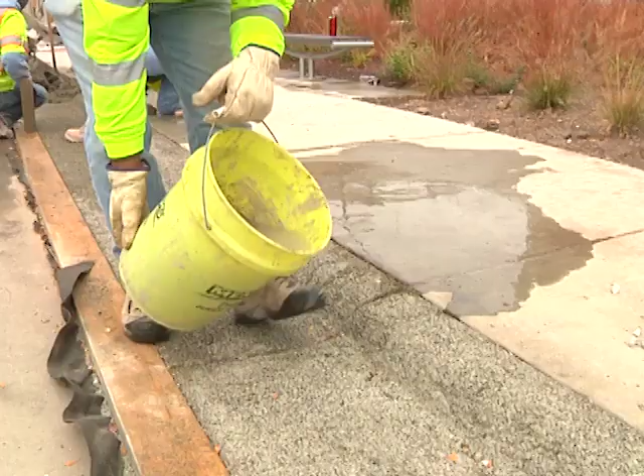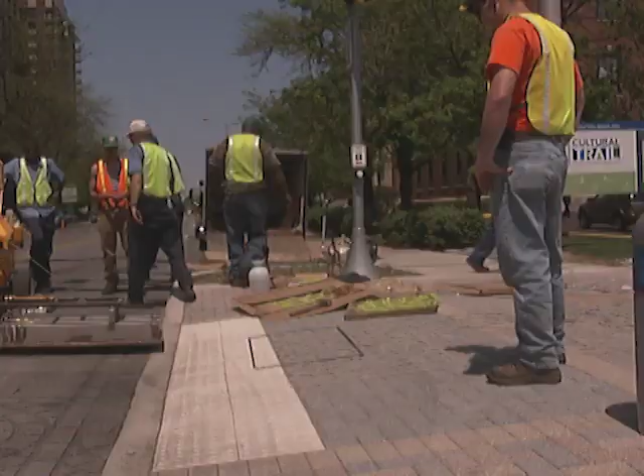We are improving water quality by using green infrastructure, such as rain gardens and pervious pavements. We are lowering the operating costs of city-owned buildings and reducing emissions by utilizing energy-efficient building management systems. We are also enhancing recycling options for our residents and constructing new bike lanes across the city.

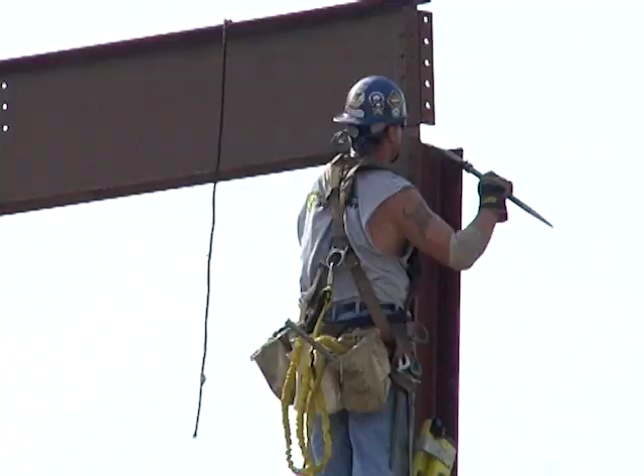The city's Office of Sustainability takes a public-private partnership approach to meeting its goals. This approach is especially critical in green building initiatives. These initiatives are most successful when local government, private organizations, and individuals work together to incorporate sustainable development practices into our city's blueprint.

Indianapolis is proud to serve as home to many organizations that embrace principles of sustainability and green building. Keep Indianapolis Beautiful, the Nature Conservancy, and the new Wishard Hospital are just a few of those organizations leading the way. There are many components to a sustainable lifestyle that are not only applicable at home, but also where you work. One major part of a sustainable lifestyle is green building.

So what is green building? Green building is the process of creating structures that are environmentally responsible and resource efficient throughout the lifespan of a building. The purpose of a green building is to reduce our overall impact on the natural environment while also considering the health and well-being of the people who use it.

So why is green building so important? On average, people in the U.S. spend 90% of their time indoors. So it makes sense to create spaces that are healthy and efficient for the people who use them. Buildings in the U.S. are responsible for nearly 40% of our energy consumption and 15% of our water use. Green buildings are created to ensure better outcomes for the natural environment and our wallets.

This is done by carefully considering all the impacts of a building project. Green buildings expand and complement the traditional building concerns of costs, utility, durability, and comfort. Unlike a traditional building, a green building is a high-performance building because it is able to function in ways a regular building cannot.

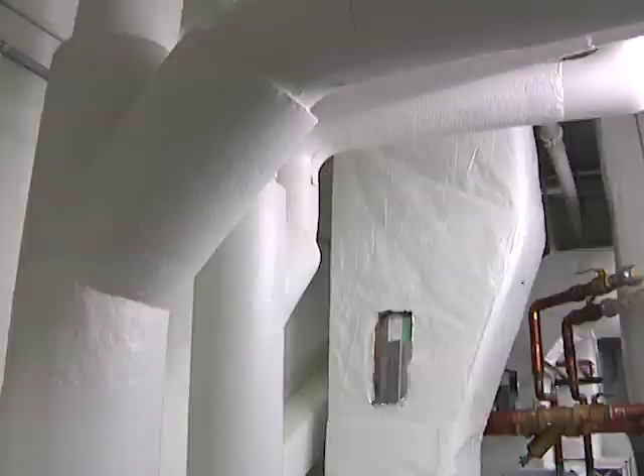For example, a green building can naturally infiltrate rainwater to avoid flooding. It can also capture and store rainwater for day-to-day tasks, such as flushing toilets and watering the landscape. This reduces costs for the building owner, conserves water, and is a relatively simple way to integrate sustainability in the workplace and community. Green building encompasses many potential strategies such as energy efficiency, materials usage, water management, and quality of life for building users and the surrounding community.

Each of these elements are considered from the outset of a green building project. Site and water considerations can include rainwater management in the form of green roofs or cisterns, or water conservation in the form of low-flow fixtures. Energy considerations might include using renewable energy sources such as wind power or solar panels. Also, energy-efficient heating and cooling systems can conserve energy.

Materials for a green building can include using locally sourced products, recycled content furniture, or sustainably harvested wood for construction.

Finally, green building can impact quality of life not only for the building users, but also for the surrounding neighborhood.

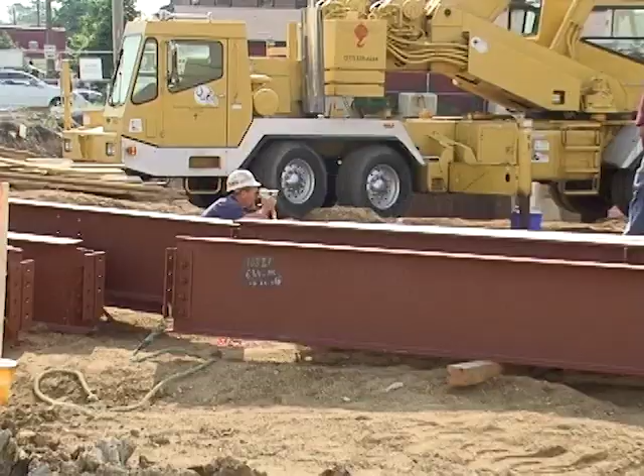So how can you tell if a building is green? A green building will have some components that are obvious and others that are less obvious. The most obvious elements are things like natural lighting, a green roof or cistern, and water and energy efficient fixtures and appliances. The less obvious components include the design, materials, and equipment that have long-term savings and provide environmental benefits, like an efficient heating and cooling system.

Another way to distinguish green buildings from traditional buildings is based on various rating systems. LEED is one such rating system. LEED stands for Leadership in Energy and Environmental Design. The LEED Green Building Certification Program is the nationally accepted benchmark for the design, construction, and operation of green buildings. It is a standardized model which uses an integrated design approach. This system, as well as other rating systems, serves as a framework for builders and designers to create green buildings.

How can green building be important to an organization? An organization that occupies a green building will see many benefits. Studies show that a healthier work environment leads to improved productivity and increased occupant satisfaction. Building owners will see long-term cost savings through lower operating costs. But the benefits of a green building aren't limited to within the walls of the building itself. A green building can be representative of the values of an organization.

Here in Indianapolis, an example of this is the Nature Conservancy's new Efroymson Conservation Center. Their new Indiana headquarters building is the pinnacle of green building in Indianapolis and represents the organization's mission in Indiana and nationally. The Nature Conservancy is an international not-for-profit organization.

We work in places all around the world, and our mission is to protect the diversity of life on Earth, to protect the plants, the animals, and the natural community types that represent that diversity, and we do it by protecting lands and waters that species need to survive.

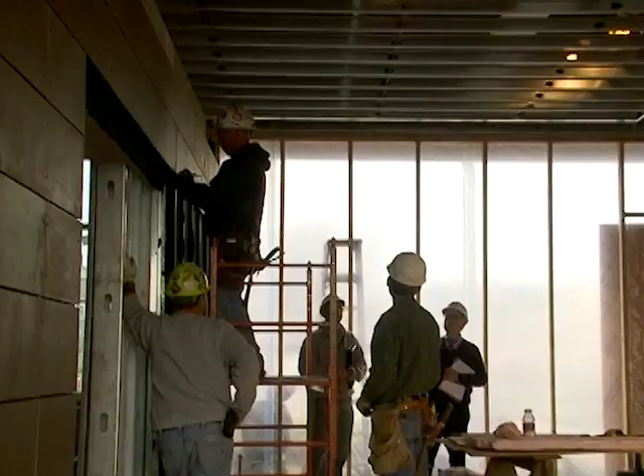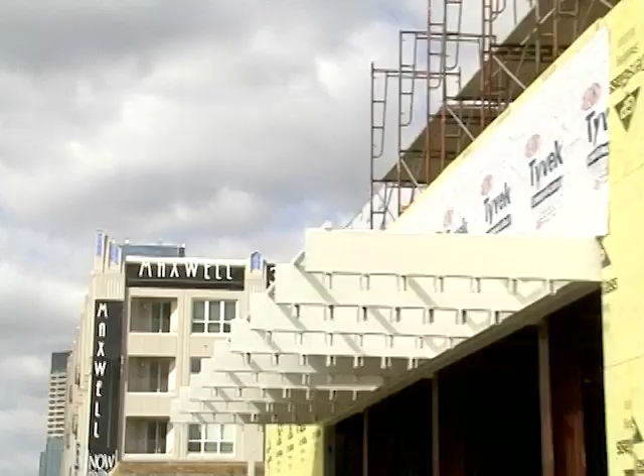Well, as a not-for-profit organization, you live and die by donations that come to you. And so one of the challenges we had is that we wanted to make sure that we could raise enough money from donors to build the building, but it wouldn't take away from the donations that we needed for our conservation work on the ground. And so we got a lot of pledges, and we brought new people to the table, people who were interested in a really sustainable building, but maybe not so interested about on-the-ground conservation. So a whole new cadre of donors came to us because of the vision of this building.

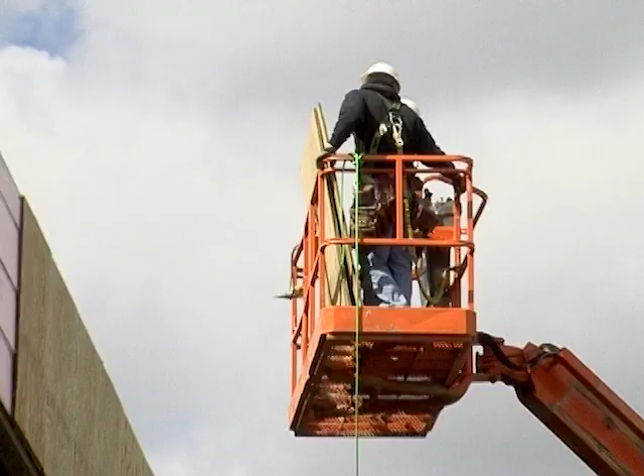We wanted to see if we could build to that highest level at the same price that we could for just normal construction. What we have is a building that uses 43% less electricity than a typical building of its size and uses 82% less water.

As we've just heard, a strong relationship between the Nature Conservancy and its funders helped lay the foundation for the success of this green building project. Another relationship, the relationship between the client and designer, is also important to ensure that goals and expectations are met. While this is true for any building project, it becomes critical in a green building project. Many of the systems in a green building are integrated, such as lighting, heating and cooling, and energy. The client and designer must work together toward a common goal to achieve an efficient, sustainable outcome.

We wanted to find an architectural firm that really fit the values of the Nature Conservancy. We interviewed a lot of different companies, and ultimately we chose Axis Architecture. They're a local firm. They have great experience in designing sustainability features into buildings, LEED experience, and one of the bonuses was they're just a block away from this building, and so they were part of the neighborhood, and it was really important for us to bring local people within our own neighborhood into this building.

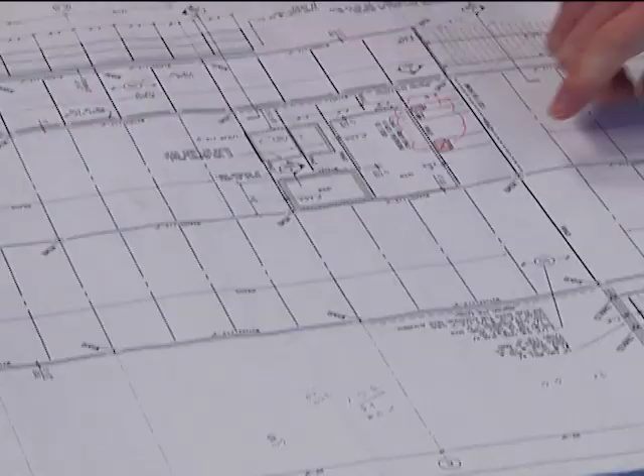What developed was an amazing partnership, a very collaborative, robust partnership of give and take between our two organizations that really allowed them to design a building that embodies the heart and soul of who we are as an organization.

Starting back when you hired us in 2007, we really sat down with you and figured out what you needed in terms of program for the space, understood your goals in terms of sustainability and marketing, and I believe we pulled all those together and created something really special that works well for you.

We weren't as familiar with green building as you are. From an owner's perspective, we were typically thinking about the end result and how we were going to use it, but we didn't know the nuts and bolts of how to get there. So it was an educational process for us as well, with the architect and construction teams bringing us along that journey, helping us understand how to get where we wanted to go.

In my mind, green building was one of the things that really made intuitive sense. It wasn't over-engineered. Part of this process is understanding that you have to think about everything at once from the very beginning, so you get to a point where it's all making sense and it's all very intuitive.

The integration of systems was particularly important for the site and water component of the project. Before design for a new building can begin, the design team must determine how the different parts of the project will fit together on the site. These components include the parking lot, landscaping, and the building itself.

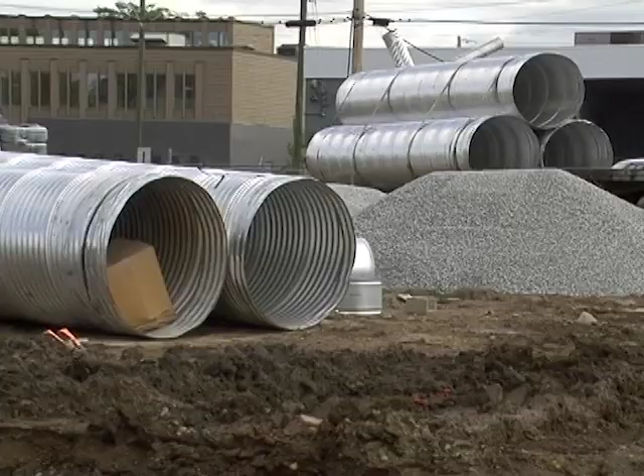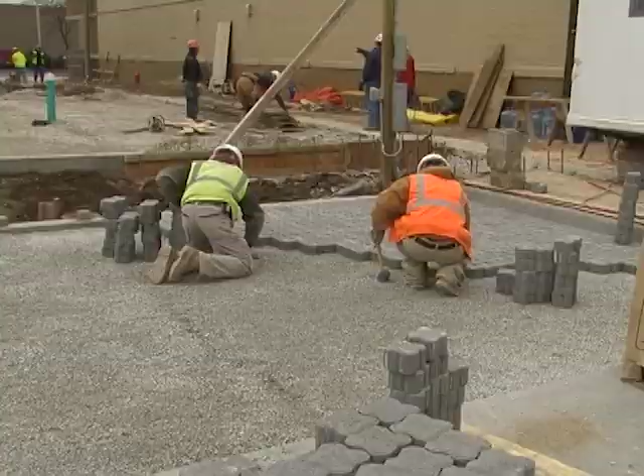A primary consideration in the process is the site hydrology, which is how stormwater is collected and stored on site. The goal in sustainable site design is to capture, store, and filter as much stormwater as possible. This can be done using a variety of green infrastructure techniques, such as rain gardens, porous pavements, and cisterns. The client and designer must determine which strategies are best for the particular site, ensuring each component works together in a sustainable, integrated site design.

Initially, going for LEED Platinum drove us to look at an urban site based on some of the site sustainability requirements regarding connection to the community. Maximizing open area was difficult in that regard because we're an urban site, a smaller site. But by putting the building further to the south and reinforcing that urban edge, we were able to leave a decent amount of area to the north for plantings.

The strategies we used on site for stormwater retention were the green roof, the cistern, and the sloped landscape back into the bioswale area just south of the parking lot.

The stormwater system for the Nature Conservancy development is one of the most exciting I've ever worked on. It takes the elements of the building itself — a green roof, the internal water use or reuse through a cistern — and incorporates the landscaping and the underground sands and gravels for the infiltration gallery, all into a single unit stormwater management system. The green roof starts everything off by collecting the water and cleaning it before it goes down into the cistern.

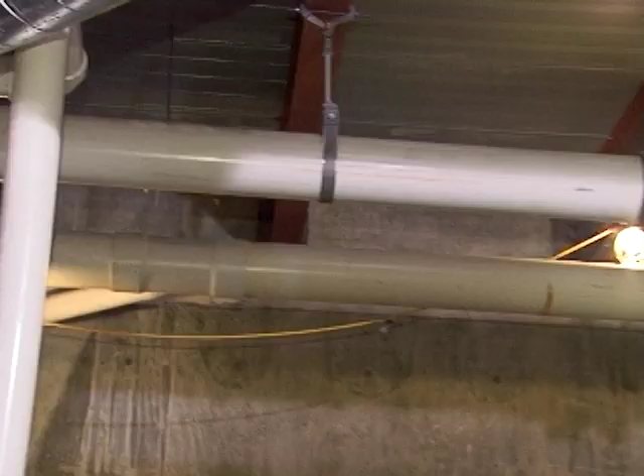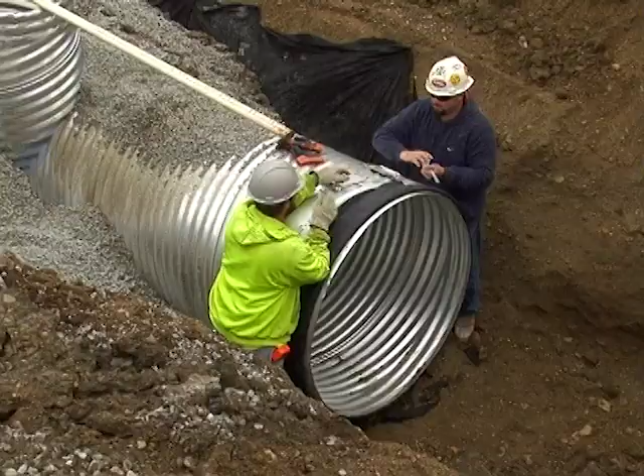The cistern holds only so much water, about 1,500 gallons, which is used back into the building itself. What isn't used in the cistern is bypassed over to the infiltration gallery underground, a large pipe with holes in it that allows the water to infiltrate.

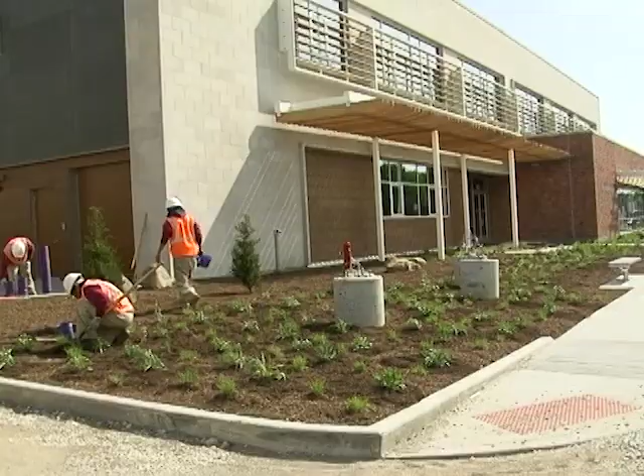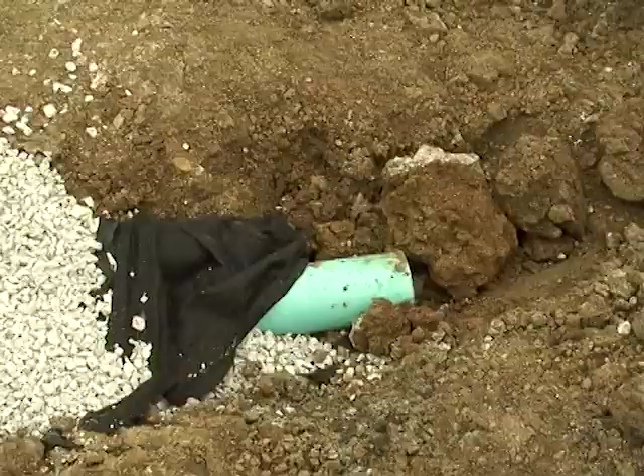On the surface we have our native landscaping, which from a LEED criteria is a water conservation landscape management tool, in direct connection to the permeable or porous pavement and the bioretention system. All of these take the stormwater directly to the underground infiltration gallery, such that all the water either ponds on site and infiltrates through the soils or is directed down underground and infiltrates into the sands and gravels.

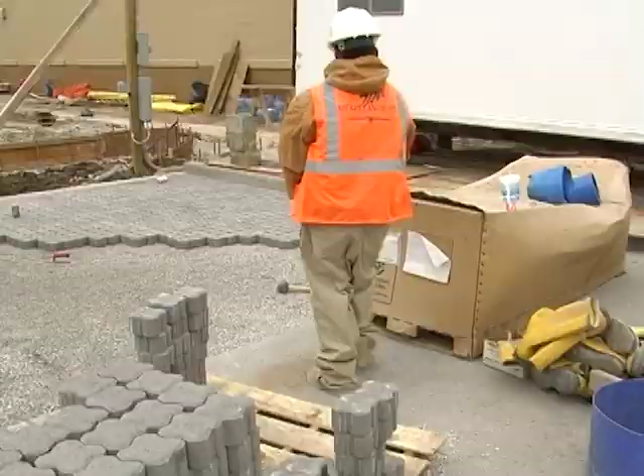The site's parking system is made up of permeable pavement, a concrete brick that allows water to go directly through it. Instead of conventional concrete, which water runs off of carrying pollutants, permeable pavement takes that water and treats it prior to discharging it into the bioretention system.

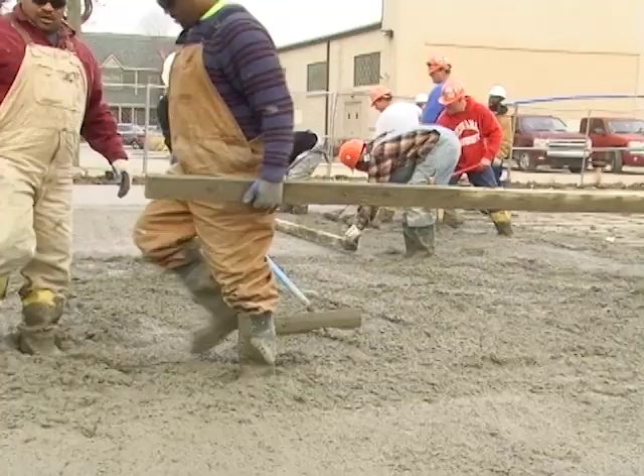Looking at alternatives of rain gardens, bioretention, green roofs, cisterns, and other natural management techniques, we were able with this site to bring forth the goal of a zero discharge site. All the water stays here.

The types of plants used on the Nature Conservancy live roof are typically sedum plants. They're all perennials — they'll go dormant in the winter and come back in the spring.

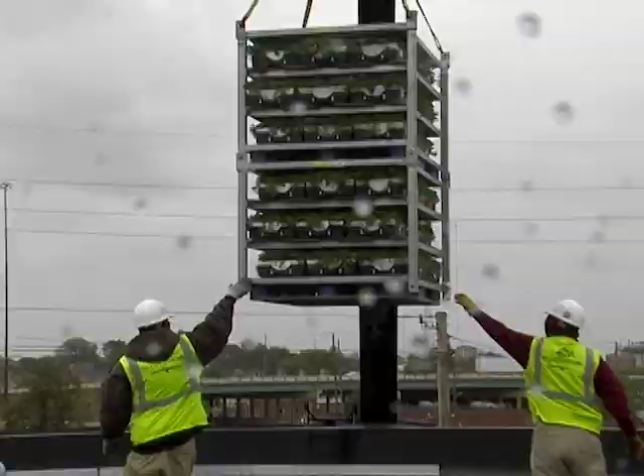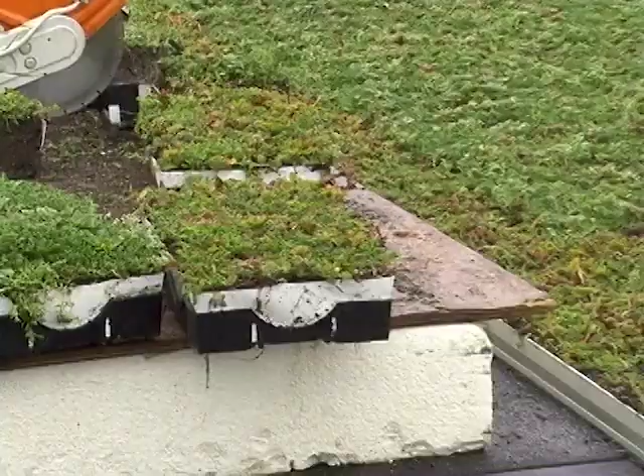During the summer months, they're all going to bloom, and they're very drought tolerant, so they'll need very little irrigation. The live roof system is a hybrid tray system, so it's meant to grow together. It comes to the site fully vegetated, so when it came here it was about 95% grown. The maintenance for it is very minimal. About every 2 weeks or so, somebody will come up on the roof and walk it, look for any weeds, if anything's growing, determine if it needs any irrigation.

The live roof system that's here is going to hold about 99% of the rainfall that it's going to accumulate, but it kind of acts like a sponge. So once that soil is saturated and it's going to overflow, the water will continue to roll through and be collected in a cistern so it can be used for other irrigation on site.

If you have a regular membrane roof, you're going to have temperatures of about 140 degrees or higher. There's going to be a lot of UV damage to the roof over time. When an owner elects to put a green roof on it, you're going to help to cool the roof. It's going to bring the temperature down to around maybe 120 degrees typically.

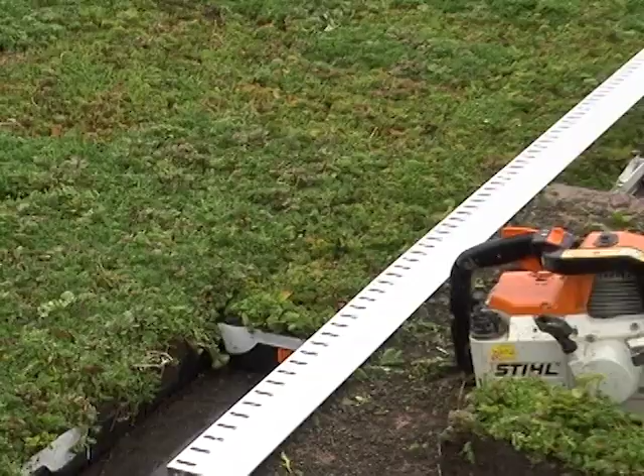By adding a live roof or a green roof system to an existing membrane, you are increasing some cost up front, but you're saving it by extending the life of the membrane because it's not exposed to UV, and you're also saving costs and energy by allowing the roof to be cooler and not having to use as much air conditioning during the summer months.

In terms of aesthetics, a traditional roof is usually a black membrane, and it's usually not very attractive looking. And with a green roof, it's actually greenscape. You're looking out into green, you're seeing plants and flowers and bees and butterflies and probably some ladybugs hopping around. So it's just a beautiful environment.

I think that was really one of those systems. We talk a lot about this building and this project not having any groundbreaking technology. It was just a compilation, and the right compilation, in bringing all the technologies together up front. But the stormwater system was one of those that was really pretty groundbreaking, tying everything together and being an ultra-urban setting that had zero discharge.

We had a number of goals when it came to developing the native landscaping for this site. Probably the first one, and maybe the most important, was just to have a beautiful setting for this green building, something that people would really enjoy walking through on their way into the building. And the second was we really wanted to use a wide array of native plants in the landscaping to show the diversity of plants that are out there and available for landscaping that can fit any landscaping need.

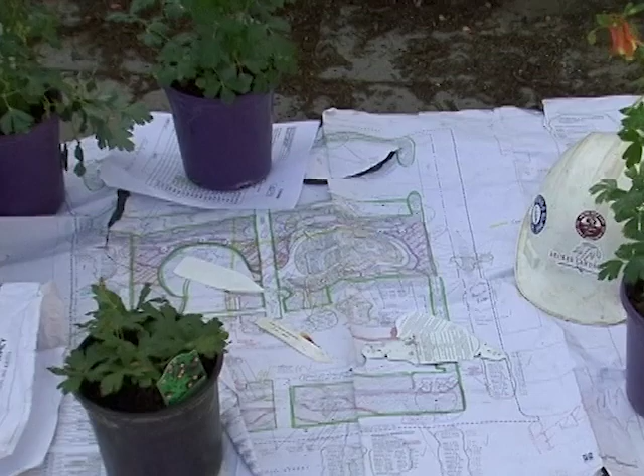And the third was, to some extent, we wanted to showcase our conservation mission in our landscaping. We wanted to take some of the plant groupings of natural communities that we protect in Indiana and replicate those in a landscaping setting. For instance, we have a beautiful natural area called Big Walnut Nature Preserve in Putnam County, and it's characterized by having these towering black walnut trees over redbuds in the understory and bluebells carpeting the ground in the spring. So we incorporated all of those species into our Big Walnut planting.

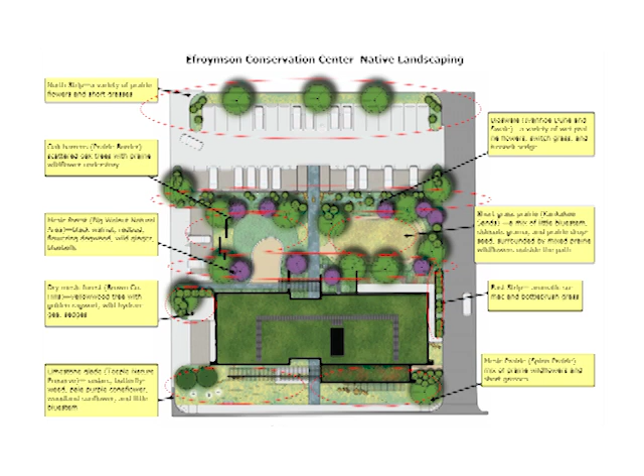And you can walk and see some of the iconic species of that community type. And we did the same thing for a number of other communities that we protect in Indiana. So people get a little bit of a flavor of what it is we do in the state just by walking through the landscaping.

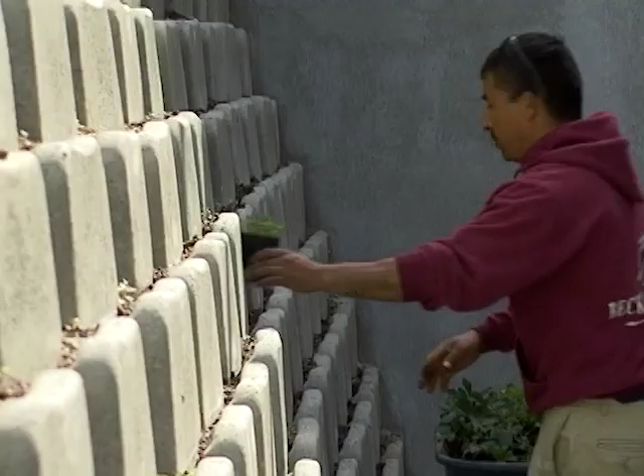Live wall was a real challenge to the landscaping because usually when you do a retaining wall of that type, what people are looking for to cover it up and make it green is a very, very aggressive vine, like a winter creeper or an English ivy, both of which are invasive and cause us great problems in natural areas in Indiana. So they were the last things we wanted to use.

So we thought about what are the plants best adapted to living with a very small root area, soil depth, and we came up with a series of cliff plants, things like wild geranium, and wild columbine, our native sedum called stonecrop, and wintergreen, native wintergreen. All are found on cliffs in southern Indiana and have the ability to deal with very harsh settings. And we've put those into the live wall, and they're doing quite well.

It's really amazing to look at the photos before and after we put in this landscaping. Before it was asphalt and gravel, and now we have over 14,000 square feet of native landscaping.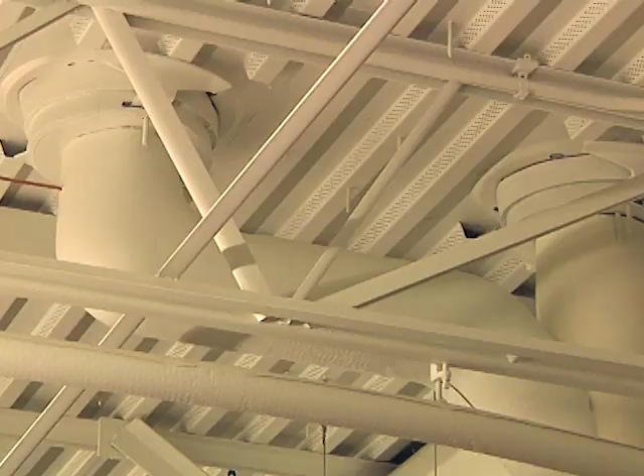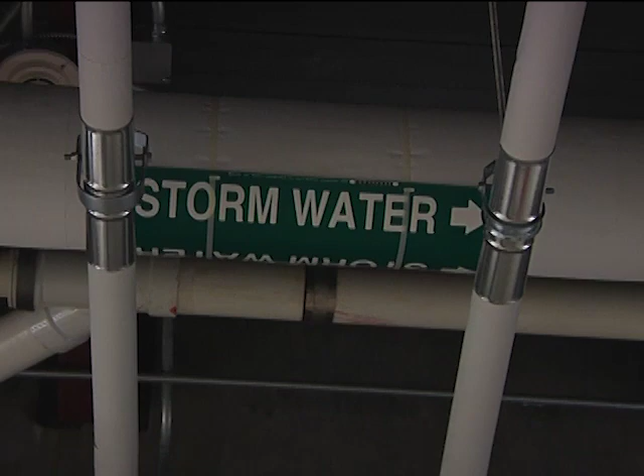So we've got an important piece of greenscaping right here in downtown Indianapolis that is visible to everyone driving by on Ohio Street, and anyone who walks through can see just how this has changed from the sterile landscape that it was before. From the perspective of the Nature Conservancy, it was less expensive to build an on-site zero-discharge system with less infrastructure than it would have been to build a conventional stormwater system and connect it back to the city's combined sewer.

From the perspective of the city, every gallon that is kept from the combined sewer is money saved in energy and operations of their combined sewer and their wastewater treatment plants. One of the things that this site brings to the city of Indianapolis, in fact to the United States, is one of the first ultra-urban developments to have a zero impact on a combined sewer. It sets the standard very high for all other communities in low-impact development.

Some of the big lessons learned, I think, during this process were the need for really tight coordination from the design process through construction in dealing with a very tight site, trying to get all of our stormwater to stay on the site, you know, with geothermal wells in the mix there too. I think that's the biggest lesson learned, is you've got to really look at everything up front.

One of the things we really wanted to accomplish with this building and with the site was to serve as a model and an example that you could get out there and touch and feel, and would really not only impact the 1 acre site that we had, but potentially impact Indianapolis and help other people to make those same decisions, or even nationally. And stormwater and the way that we handle that on site is one of those areas that really did leverage up.

Other people paid attention to it, have looked at making similar decisions on their own property, not only in Indianapolis, but nationwide. The fact that it wasn't a cost increase to do so was also a big benefit in being able to show people that.

A fundamental concept of green building is energy efficiency, which delivers low operating costs and environmental benefits. During the design of a building, the architect takes into consideration all the ways energy will be generated, used, and managed on the site. A building uses energy in several ways. These include the lighting, heating and cooling, computers, and appliances. A building project can create energy by utilizing renewable energy sources, such as wind, solar, and geothermal.

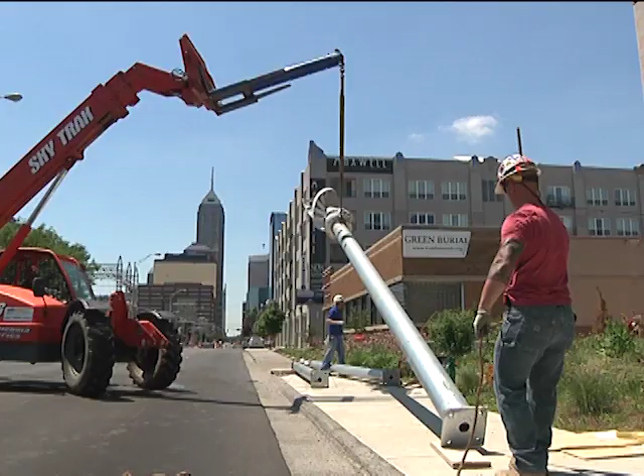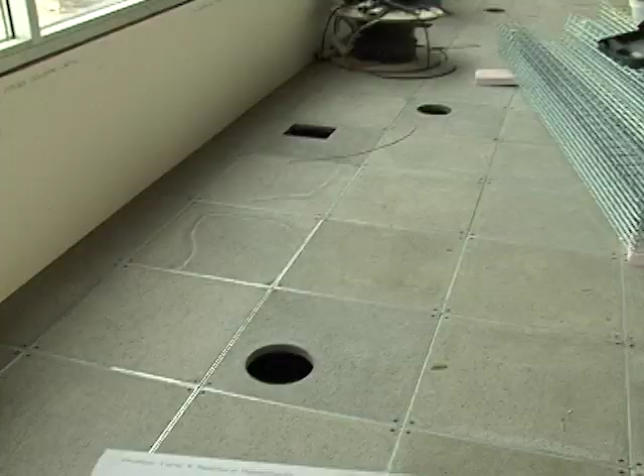The energy goal of green building is twofold. First, to use energy efficiently, and second, to produce energy sustainably if a renewable source is viable. It is essential for the client and designer to consider the characteristics of the site that influence the viability of using renewable energy sources. Another important factor is the integration between the building systems and the natural environment.

Energy is one of those categories that's very important for the LEED Platinum rating. Obviously, you need to get a lot of points in EA Credit 1 so that you can get to that level. We have to look at a bunch of different things and how they all interact, from the light systems and how using less lighting introduces less heat into the space, so therefore you can reduce the HVAC loads, to the raised floor system, which allows us to use smaller fans pushing that air through the space, all the way to what type of insulation we have in the walls.

And all of these things come together, including renewable resources like on-site energy, wind turbines, to really get that energy model shrunk down in terms of your energy use. Right, and from our perspective, I think there were really three things related to energy. The first is, reducing energy has a close impact on the environment, which is a big part of our mission. The second, reduced energy costs for the ongoing operations was important to us as an organization.

And the third part about energy was making it as automated as possible. All of the controls in the building, even though we're the Nature Conservancy and we're probably pretty in tune with that and careful about managing our energy in the building, it's made a world of difference to have that automated. We don't have to think about turning lights off as we come out, and it's saving us energy consistently throughout. So that was really an added bonus of those sensor features throughout the building that made a big difference for our energy costs.

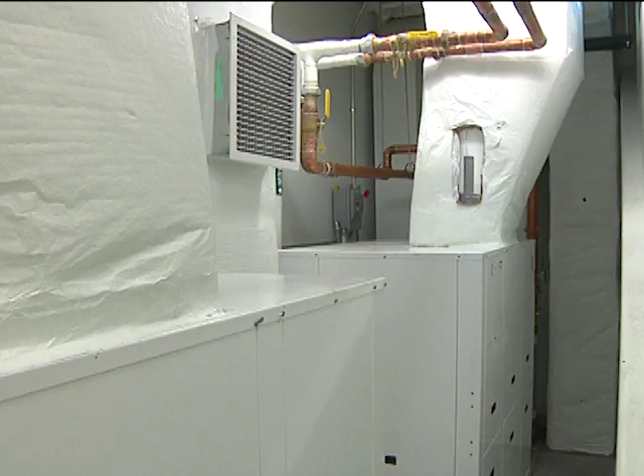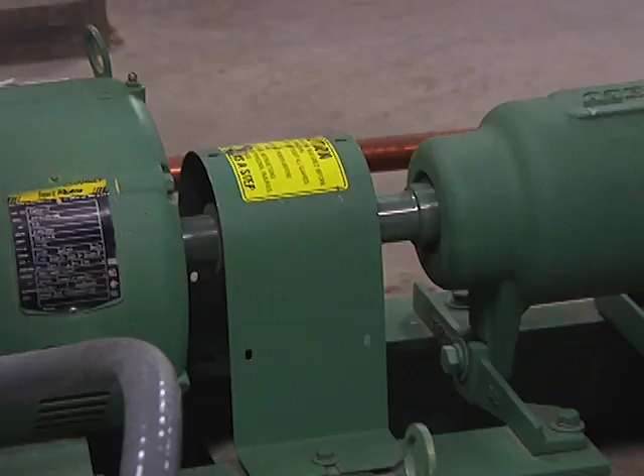Exactly. The geothermal design is, if you wanted to compare to a residential project where you might have commonly called a heat pump outside that exchanges its heat to the air, this one actually exchanges its heat into the earth. And it can do that year-round. So in the winter, when we want to heat with our geothermal system, we're pulling heat out of the 55-degree constant earth temperature and using that heat to transfer through a cooling medium into the space.

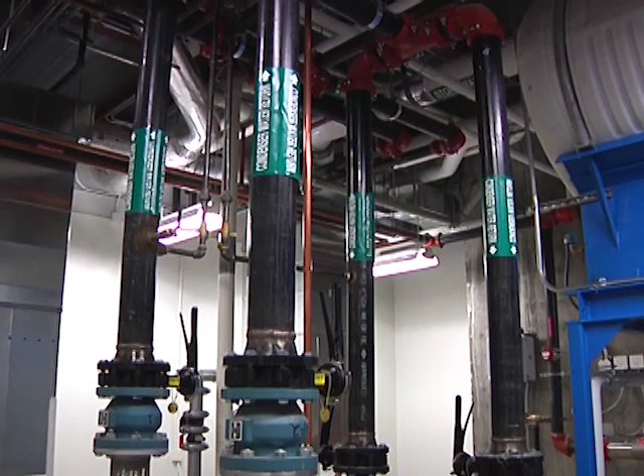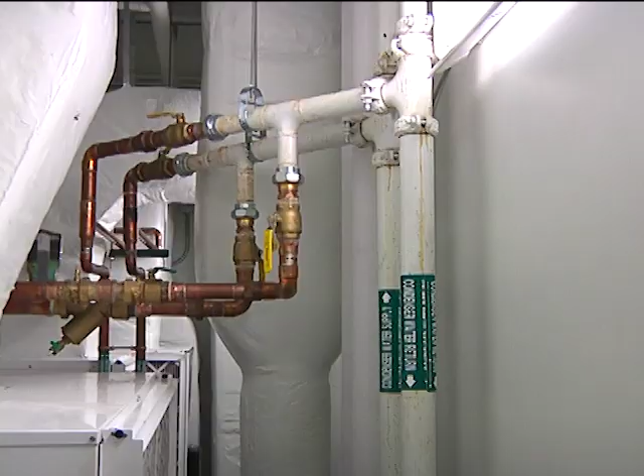In the summer, then, when we want to reject heat, because we want to get rid of heat that's in the building, then we send that fluid back into the earth, which will be hotter than the 55-degree temperature, and we sink it into the earth and get rid of the heat that way. The components in a geothermal system involve transferring a fluid, and we use a glycol solution. It's called propylene glycol.

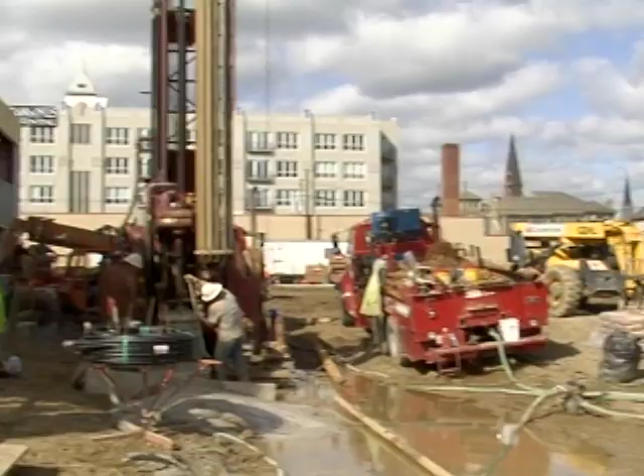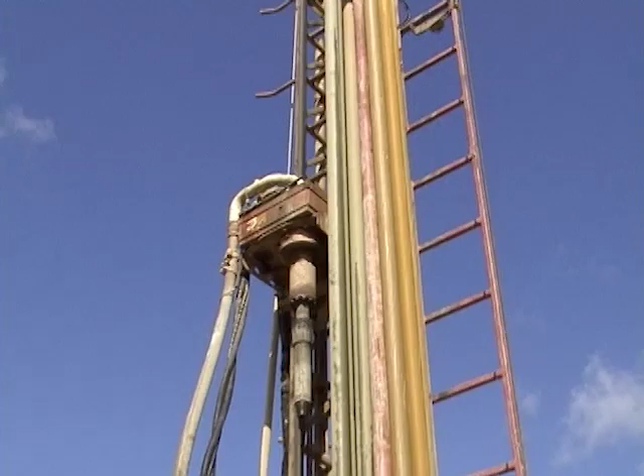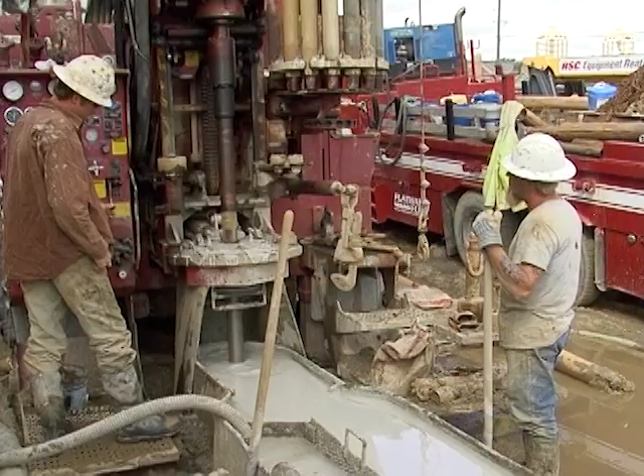We transfer that fluid through piping that runs underground and into what we call bores or wells. We drill wells down into the earth, and in this project we drilled down 300 feet into the ground, and we used 38 wells to accomplish the tonnage that we need to transfer the heat into the earth. We chose the vertical bores on this site because it uses the least amount of land area, and being limited in an urban setting to just a small site here, we took advantage of the parking lot and some of the landscaping outside and developed our well field outside.

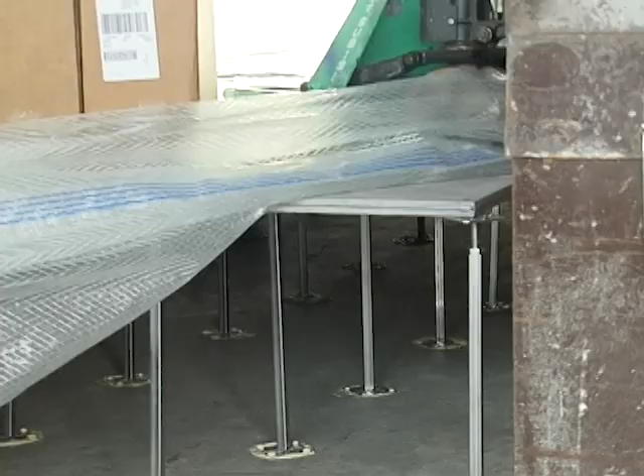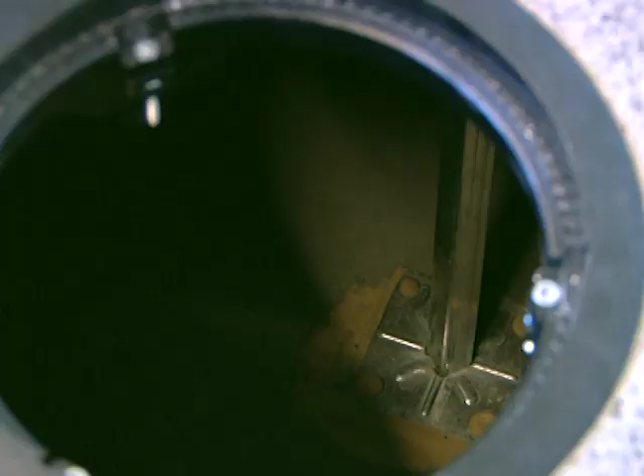In this job, it's a little unique in that we have a raised floor system, and the raised floor system takes advantage of supplying our air from our heat pumps down under the floor and using the entire floor as a plenum, and then you decide how much air comes into the space by using floor diffusers that are located in strategic locations based upon the occupancy. The airflow from the heat pump units supplying underneath the floor supplies a temperature that is typically around 60 degrees, and that makes it comfortable for that air to come up around you.

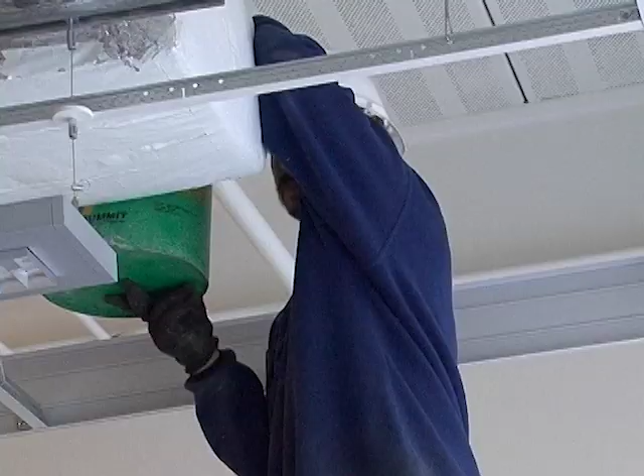We use the underfloor air distribution system because we have the cleanest air that came through our heat pump unit that was filtered and it was conditioned air. We supply that into the plenum. We supply that up into, let's say, your cubicle or your room through a floor diffuser. It moves that dirty air up to the ceiling, and then we return the air at the ceiling. So we're always keeping the cleanest air around the occupants.

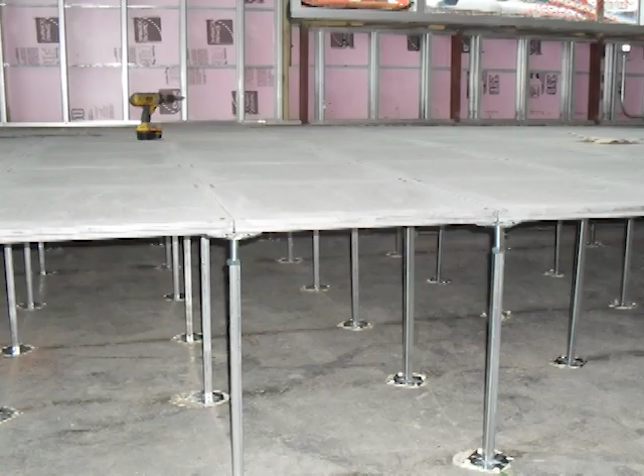The underfloor air system also offers an acoustic separation between air delivery into the space coming from underneath the floor. It has to pass through a pretty heavy floor panel. That separation of the air, which is at a very low velocity, very low static pressure, actually moves fairly slow up through the space, and so it doesn't make as much noise.

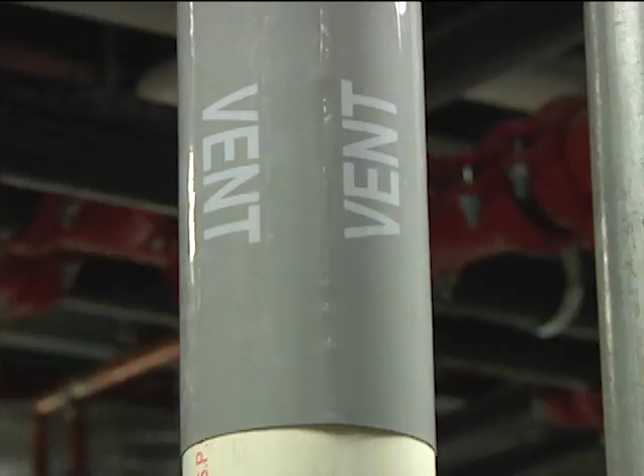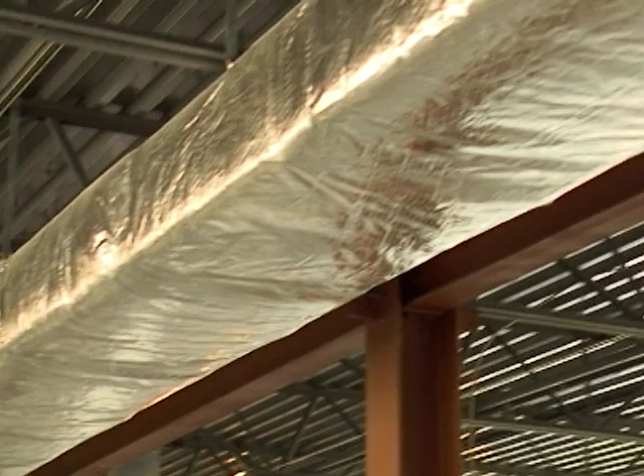One of the LEED points we went after here was increased ventilation. And it's important to bring fresh air into the building. We're building the buildings tighter. We have a more controlled environment for infiltration of dirty air coming in from the outside. So we have a dedicated outside air heat pump unit that brings in the amount of air that we need based upon a given amount of air per person that we account for. We condition that air and distribute it throughout the building by ducting it to each one of the heat pump units. Each one gets their own source of outside air.

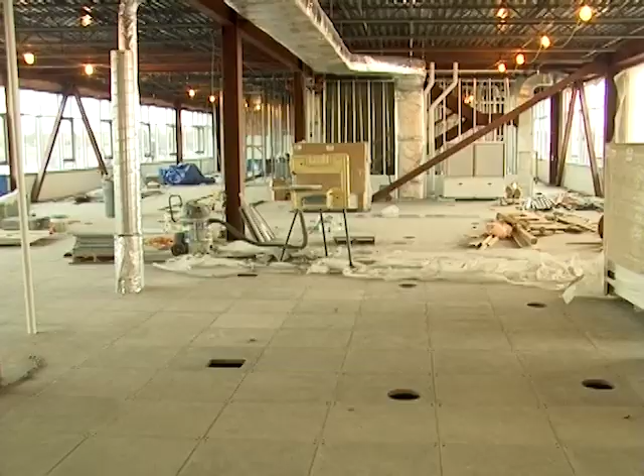In our modeling, what we call our energy modeling of the building, we computer simulated it through a year's operation. And the year's operation energy costs for the building were expected to be about $24,000. We're saving $10,000 a year by using the geothermal, the more efficient lighting system on this building, and the method that we're using to deliver air to the space with the underfloor air system. So we think we have a decent payback on this project.

I think one of the things that a lot of people don't think about in terms of energy efficiency is introducing natural daylight into the space.

Within this project, we're able to get every occupiable space a view and natural daylight, which reduces the amount of electric lighting that's required and therefore reduces the amount of HVAC that's required, therefore reducing your total energy consumption. With the added benefit of all the staff able to have natural daylight in their workspace.

The goal that we were trying to address with this building as it applies to LEED was to, number one, provide comfortable lighting that suits the purpose of the people that are here. And at the same time, we need to minimize wasteful lighting, overlighting things, as well as LEED's very particular about amounts of light that spill out of the building onto the site. So we had to be very careful about placement of the light fixtures, where they are from the windows, so that we're not throwing a whole bunch of light out of the windows onto the site.

The fixtures we selected in here, a lot of them use a high output fluorescent light. It allowed for the fixture body, the shape of the fixture, to be much smaller, so it's a more economical use of materials in constructing the fixtures. We tried to provide a light level through ambient lighting. Most of it is indirect. It bounces off the ceiling and down onto the space on the order of 20 to 30 foot candles, which is a comfortable level, but sometimes that needs to be supplemented by task lighting at the spaces.

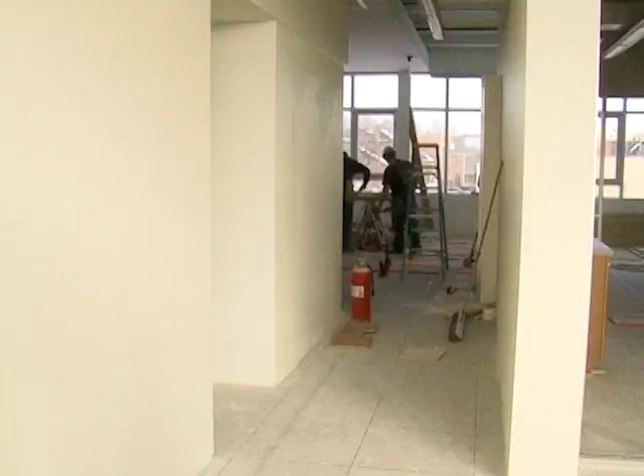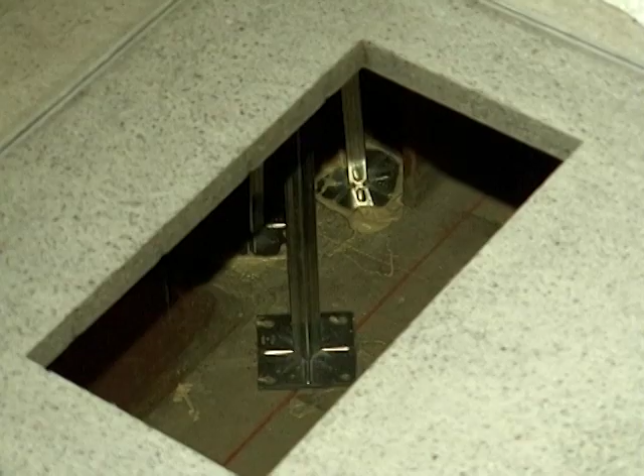Most paints, adhesives, carpets, and furniture give off volatile organic compounds, or VOCs. Over time, these harmful chemicals evaporate from the building materials into the air we breathe. This is called off-gassing, and the effect gives a traditional building that new car smell. Long-term exposure to these chemicals is unhealthy for the people who live or work in the building. Green buildings avoid the use of materials that off-gas these chemicals and instead use low VOC materials.

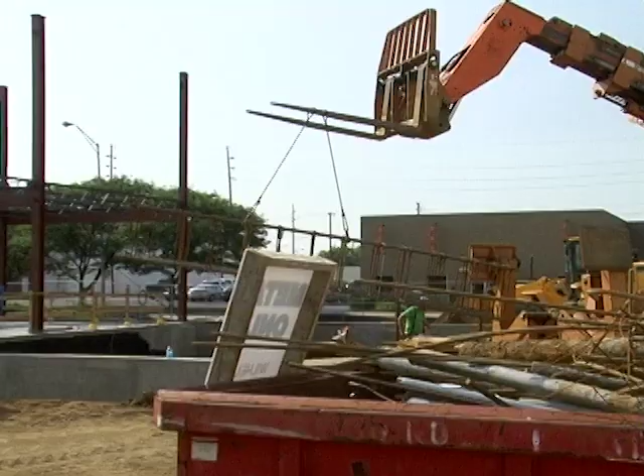Finally, another goal of green building is sustainable waste management. This includes the recycling of waste during construction and after the building is complete. Building materials include everything from the steel structure and drywall to the flooring, paint, and furniture. Therefore, it is necessary for the client and designer to collaborate and share the common goal of using the most sustainable materials possible.

In terms of LEED requirements, there are a number of different things in the materials and resources category, like utilizing low VOC paints and adhesives, using rapidly renewable resources, recycled materials, things that we've tried to incorporate within the project as much as possible. But I think one of the things that gets kind of lost is the fact that a lot of times you don't have to use a material in a space to accomplish what you're trying to do, and really the use of no material is probably the most sustainable thing you can do.

And materials to us was really important because we had certain materials that we wanted in the project that really meant something to us. We've got a lot of Indiana limestone in the project. We have a lot of Indiana hardwoods. The hardwood was produced on 3 of our preserves through sustainable forestry practices. So that material not only warms up the space and makes it feel more like our mission, but it also gives us the ability to talk about things like sustainable forestry. As we bring people through the building for tours, we can help educate.

One of the things that people sometimes forget about is reusing materials when they can. Case in point, when we reused the bricks from the buildings that were on site previously. The Nature Conservancy project had LEED requirements to divert 75% of the construction waste from the project away from traditional landfills. On this project, we utilized an on-site trash sorting and separation process in which we separated the construction debris into several categories: aluminum and metals, cardboard, wood products, general trash, and construction debris such as would go into a clean fill.

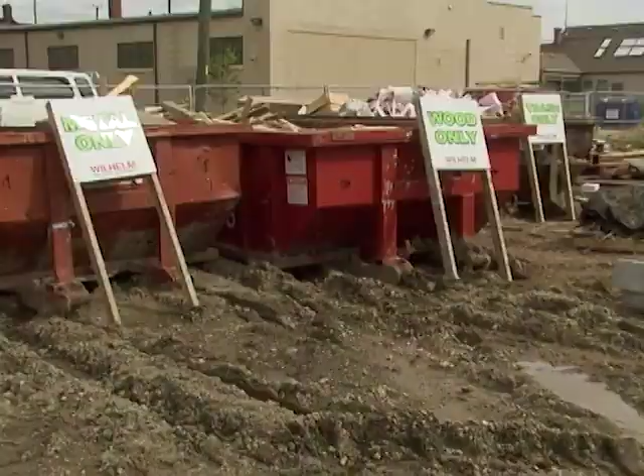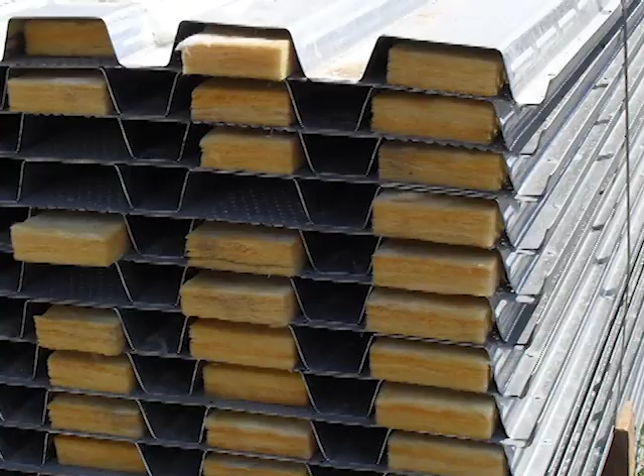We were able to divert 79% of the waste from the project away from a landfill to a recycled or clean fill site. This resulted in 129 tons of debris that was redirected. Another component of the Nature Conservancy were the regional manufactured materials. This is a LEED requirement for 20% of the materials on the project to be manufactured within a 500-mile radius of the project. 60% of all materials on the project were manufactured within this 500-mile radius.

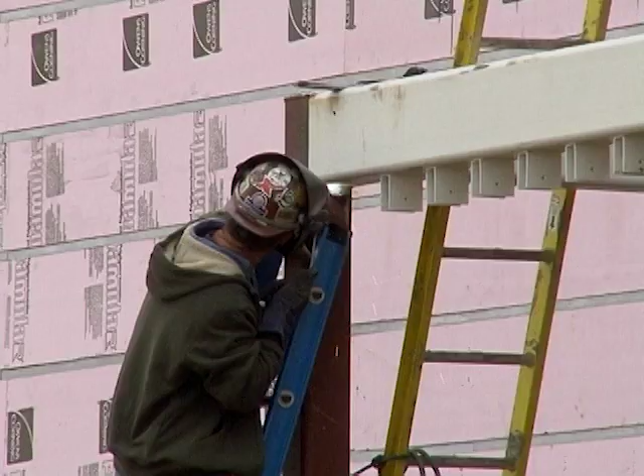Some of the major components that are regionally manufactured are the structure, the steel, the concrete, the rebar reinforcement, and the Indiana limestone, which is on the exterior of the building. The existing structures on the project site were not fit for use or occupancy and required demolition for the clearing of the site for the new project. This allowed us to look at the projects and decide what could be reused or recycled.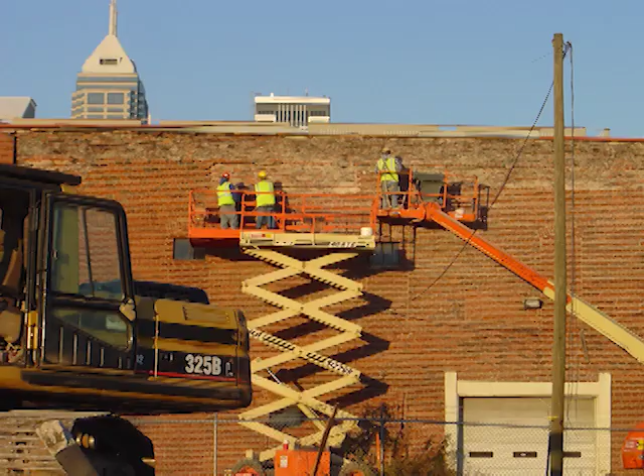And the architect reviewed the brick on the existing buildings. During demolition, this brick was removed, cleaned, and then we reused the brick for the exterior and lobby of the building. And it turned out to be a unique 100% recycled component and a beautiful aspect of the exterior.

It really blends in well with the building and gives it a lot of age and character right from the beginning. With all construction projects, large or small, there are opportunities to use several of the methods utilized on this project to help your project become more green.

From the beginning, we really understood that there were a lot of LEED requirements in terms of materials. So being able to talk with you from the very beginning about the potential to use some wood that you had in your properties, down to reusing some of the brick that was on site, it was good to get that stuff fleshed out early because we knew there were going to be lead time issues in some instances.

That upfront planning about the wood was really important for us as an organization because we needed to plan in advance how to do a sustainable forestry harvest on three of our properties. That allowed us to pick out red oak, shagbark hickory, maple, and tulip poplar for use in the building. A really neat part of the building that we were tied into closely: our staff members had touched that wood multiple times before it made its way onto the construction site. It really warms up our space and ties us back into the mission, even when we're working at a desk and looking at wood in the building.

When selecting the materials for the Nature Conservancy, working closely with the architect and the client, our goal was to bring the outdoors in. The Nature Conservancy really didn't want to feel that departure. So when we selected the finish palette, whether it was the carpet that had shades of browns or trees in it, or the sidelights with etched trees in the glass, or the colors we selected, they all contributed to elements you would see in nature.

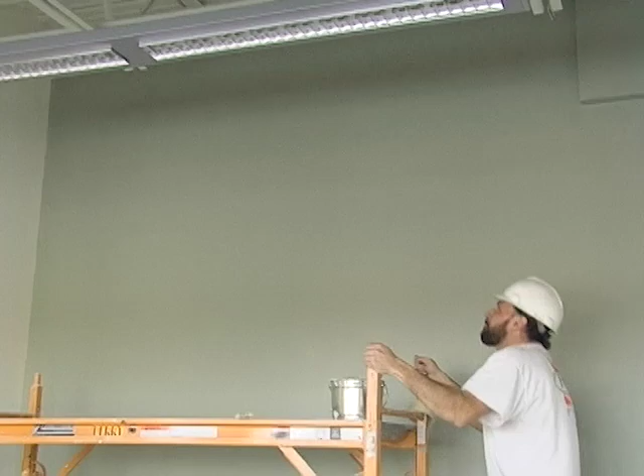But we had to make sure we selected finishes they could afford. So the carpet tiles, the paint—that was really the majority of the space. Being able to have items such as the wood owned by the Nature Conservancy contributed finishes we didn't necessarily have to spend a lot of money on. So whether it's finding some material, reuse is always a great way to do things for a low cost. Paint goes a long way, and low VOC doesn't cost much more than traditional paint. Carpet tiles, while seen as an upgrade to broadloom, go such a long way in the end that you'd never have to upgrade it. So really you can do a space that's beautiful and LEED compliant without spending a lot of money.

The majority of the space has very little material added. The whole entire lower level is sealed concrete, and a lot of the first floor is as well. The ceilings are exposed for the most part. We really tried to pay attention to where we wanted to use the materials and how, and if it didn't make a significant impact on the space, then we chose not to use any.

The task chairs we have have high recycled content, and they can basically recycle almost everything down to the gasket on those things. For the workstations, being laminate, there are pieces of it they can recycle—the substrate they could recycle, breaking it apart into pieces at the end of its life cycle. Another way the furniture has recyclability is not necessarily in breaking down its components and recycling it, but just reuse.

Here at the Nature Conservancy, we try to incorporate sustainability into everything we do on a daily basis. For example, for events, we encourage people to use chinaware and glassware as opposed to disposables. We also have a recycling program here, including standard recycling of plastics, metals, and paper. We also do electronics recycling, and we compost all of our yard wastes.

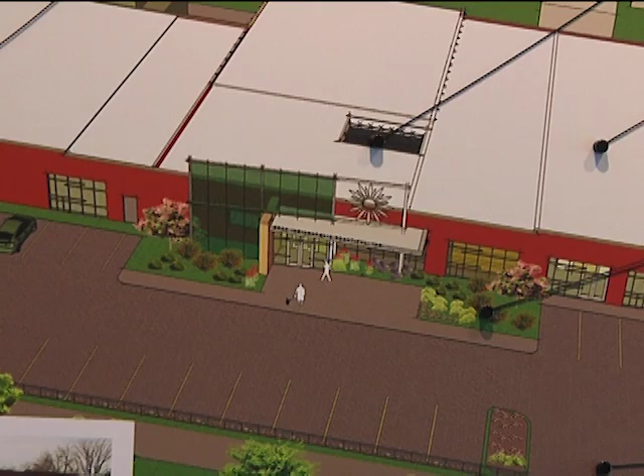We really believe that green buildings provide a triple bottom line. That's incredibly important for this city. I'll use our building as an example. The environment, obviously, that's pretty obvious. You're cleaning the water, you're reducing energy consumption, you are thinking about the environment every step of the way. So how you operate, and every day when you come to work, you're doing something with the environment considered. That's huge.

Healthy environments and a healthy neighborhood ultimately create a greater output for our local economy, helping Indianapolis thrive, creating more places that seem vital and where people want to go. So we believe that our building had much to do with meeting Indianapolis's needs for a better environment, stronger neighborhoods, a stronger civic life, not to mention the economic benefits that are secondary to the development.

Green buildings and sustainability are part of an overall future, I think, that's bright for this city and will be a very, very important contributor to the future of this city. We've established a green business initiative, and that has grown considerably over the last 2 to 3 years because more and more people and more companies and entities are recognizing the benefits of living and creating a more sustainable environment.

Because LEED requires the use of local sources, it's an opportunity to create economic growth in the Indianapolis area by using local manufacturers, as well as architects and engineers, but we're also using the local resources. More recently in Indianapolis, there's been a resurgence and redevelopment in the Near East Side downtown area, and the Nature Conservancy has really taken the lead in helping that redevelopment, which has been a great benefit to our city.